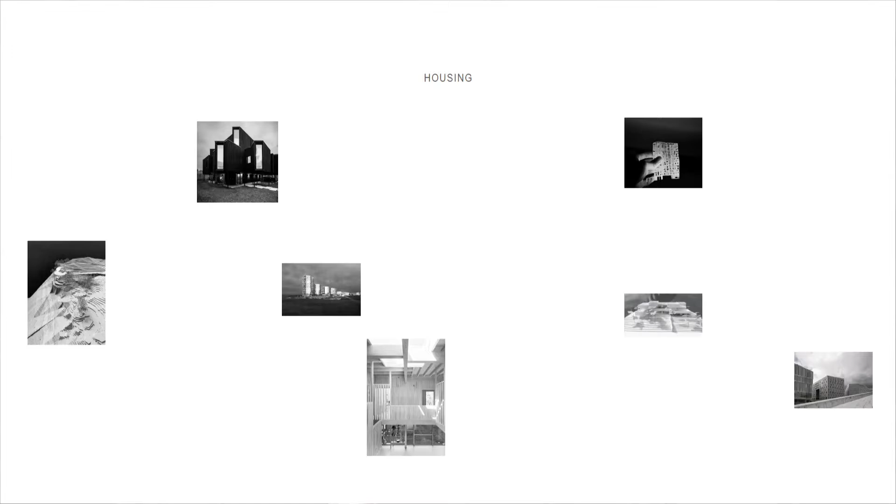This is an impression of the span of some of our work: public buildings, housing projects, quite a few smaller projects, rehabilitation of cultural heritage projects, and a lot of collaboration projects.

Today we will speak about four projects. I will start with our first project, which was a collaboration. Then I will speak a little bit about the library, and then Jonas will take over.

So this is our first project, which we did with some French architects, also young and ambitious. It was the city of Sandnes on the western coast of Norway, a traditional pedestrian shopping street that was dying because of urban development along the harbor with shopping malls. The city really wanted to do something to bring life back into this old pedestrian street. They asked for a competition with a covered small plaza with a stage and amphitheater seating.

So we started working, 7 partners, trying to find out how to work together. Lots of ambitions, we had all the time in the world, we were young, no families. But how to start, how to work? We did a lot of analysis, visited the site, and spent time together to get to know each other.

You can analyze the program as much as you want, but it doesn't necessarily come out the project. In architecture, that is what is so fascinating - there are many right answers. You cannot put all information into a robot and out comes the perfect project. So there will be many right answers.

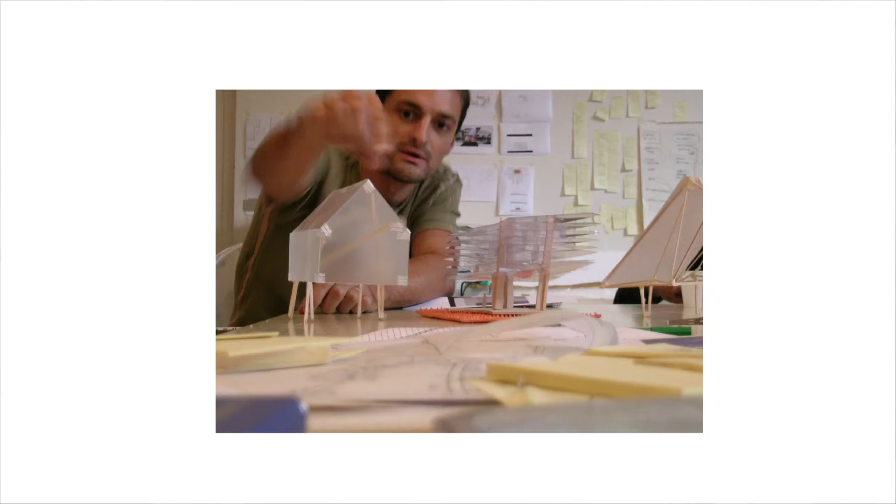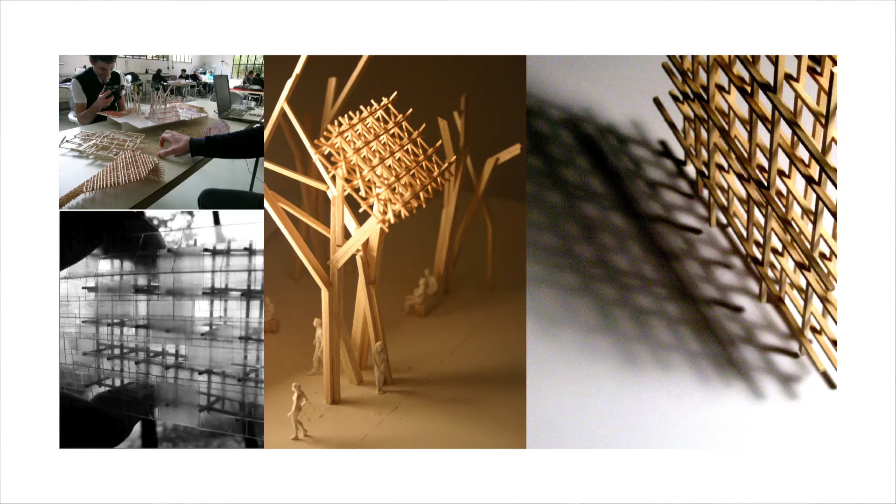So we suggested a quite simple, bold volume to give some kind of positive input to this pedestrian street. We rejected this idea of the fixed stage and seating. We said no, this should be much more informal, just the plaza floor floating between these columns. And we really tried to develop the structure so it could play with the light and changing weather.

So this is how it turned out.

So the Deichman Library project. Deichman is the public libraries of Oslo. The former main public library that was now to be replaced was built in 1932.

Already when it opened, it was criticized of being too formal, too inaccessible with all these steps. So the city called for a new library, 20 international architects competed.

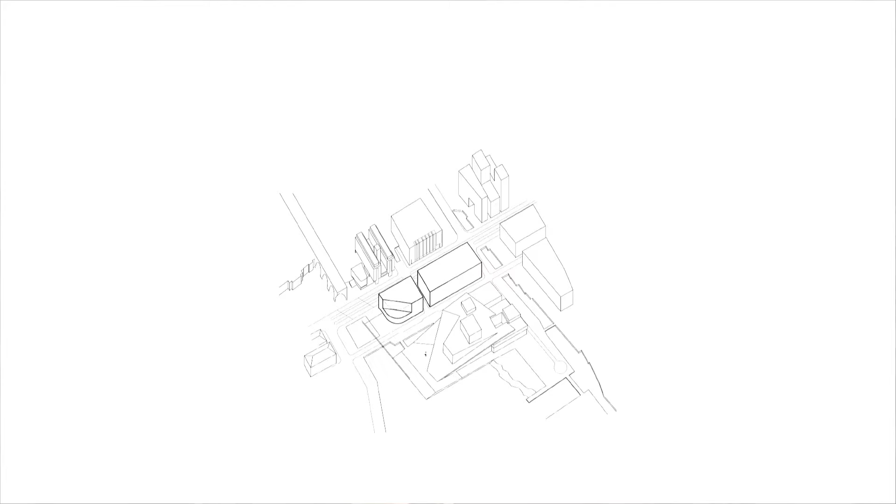And then we start working - a lot of physical models, and trying to work together to avoid this kind of personal ownership of the ideas, because that can be very difficult to handle in the process. So if you have developed lots of ideas together, it's more easy to evaluate them in an objective way.

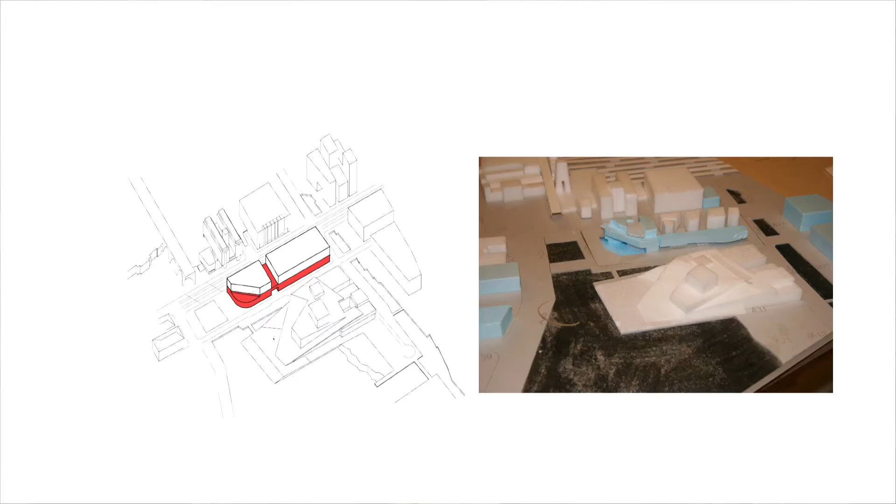One solution could be to build a horizontal library. That was tempting, of course, to have good contact with the street, let the people directly into the library. But it was some challenges with the street that was crossing, and we thought also maybe it's not good for the city to have this monofunctional thing, and also for our ambition of having this interconnected space where you can see things that you didn't plan, you are inspired to explore more. Here it would be very long distances.

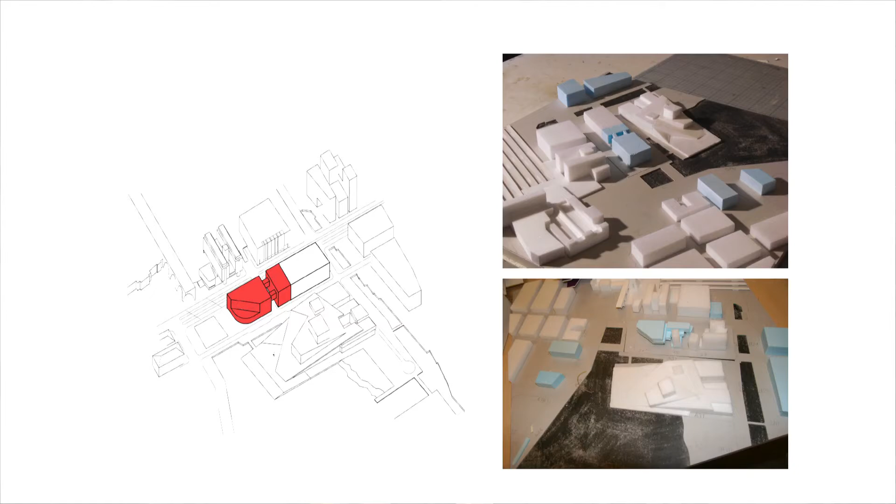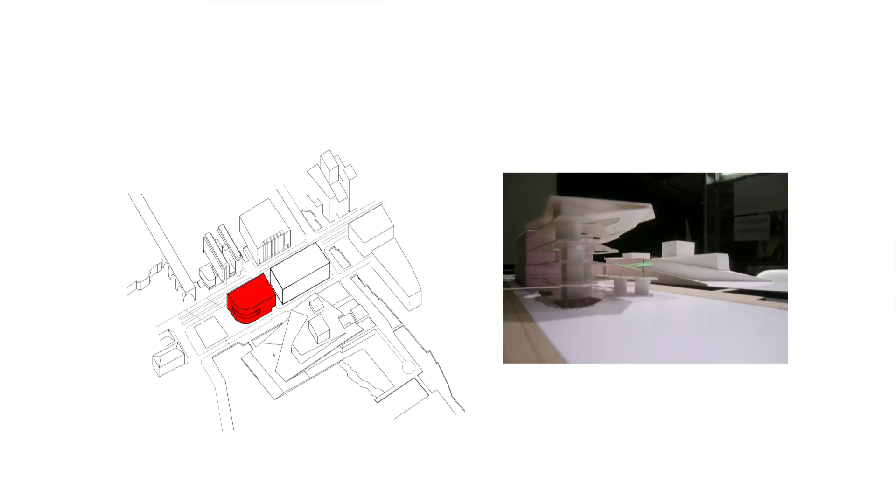We could put the library to one side or the other. This was the obvious placement because you have the public space in front, but the site was a little bit too small. By cantilevering some of the volume above a restricted sight line and the street behind, we managed to place the program inside what we thought was the right site.

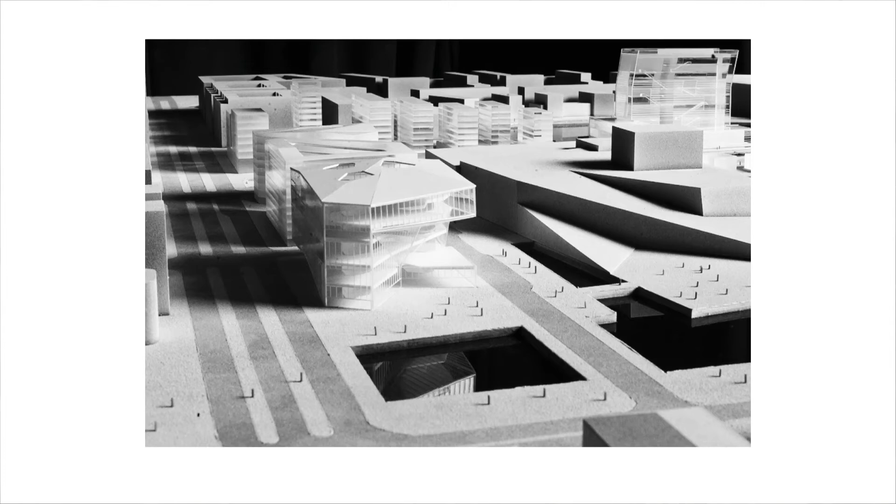So we ended up with a volume that was quite vertical, with 5 main floors, plus a basement and mezzanines. One main challenge with the library was how to connect these floors and inspire people to explore the different parts of the building.

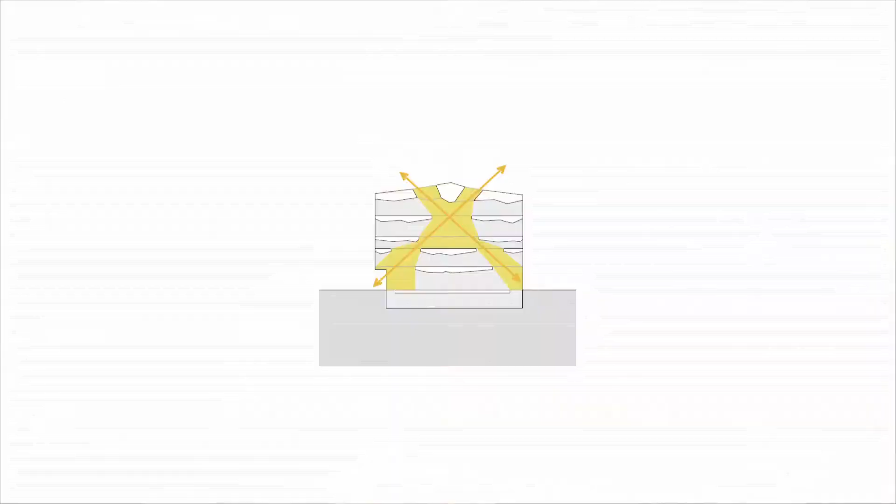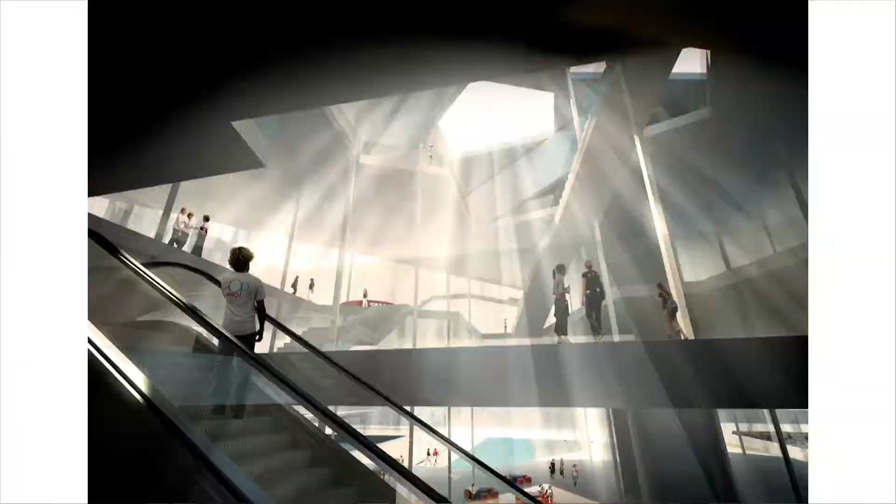We organized all the small rooms around the 3 vertical cores containing the infrastructure to maintain an open space where you can explore to see what is around the corner. In the open plan you get different spaces that could have smaller events, that you don't have to enter through a door to go to a small lecture or reading place.

Here we see axonometrics of the ground floor, where you enter from 3 directions into a central plaza. And you circulate up through the diagonal light shafts, the atriums. They meet on the 3rd floor to create a big atrium.

So there are lots of small places connected into this big space. Different intimate spaces where you can almost touch the ceiling, leading into very open big spaces.

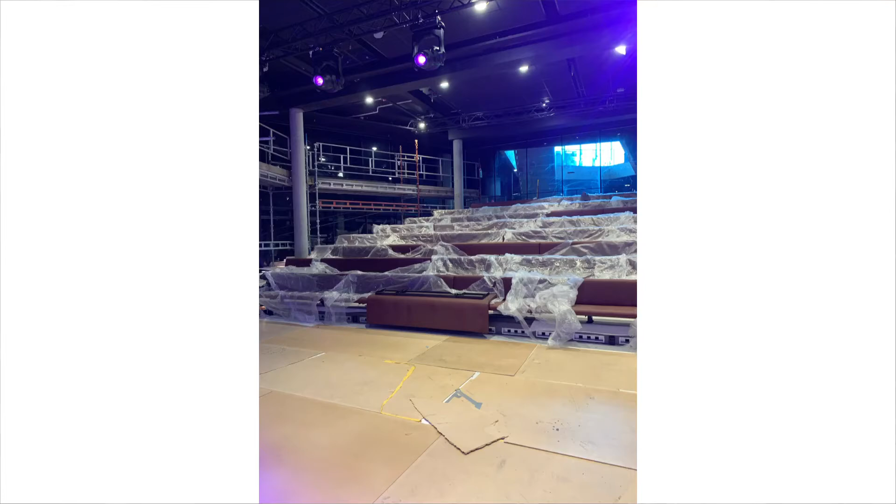Here we are in the basement where you can see all the way out from the big theater hall. We struggled a lot to keep this theater open, so from the entrance you can see all the way down to the stage to see some events happening.

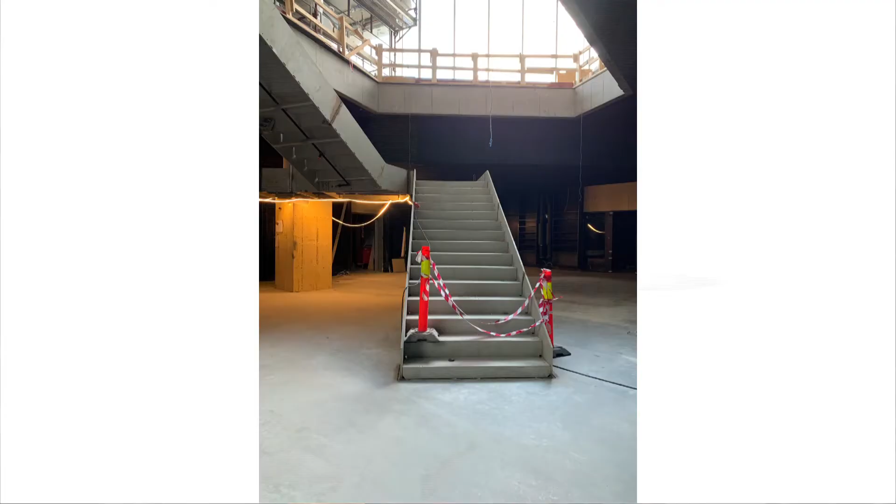A gallery in the basement where you can almost touch the ceiling. And working your way up, getting a glimpse from each of the 3 entrances, up through the building, up to the sky, to spark a curiosity to explore the building.

And we see these mezzanines also on the edges around this atrium, where there are lots of reading spaces. This is not a traditional library where you have closed reading rooms. You read in a social space, in the open.

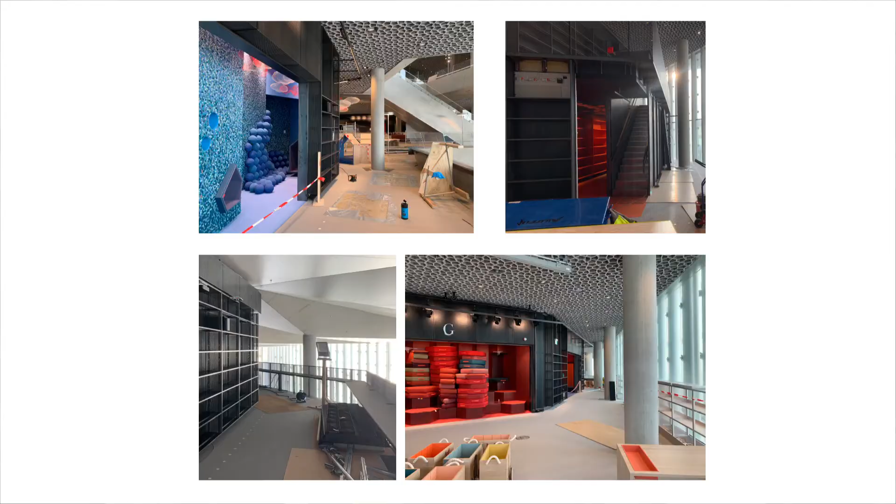And all the small rooms around the cores are open niches, more spaces than they asked for. It opens in 3 weeks.

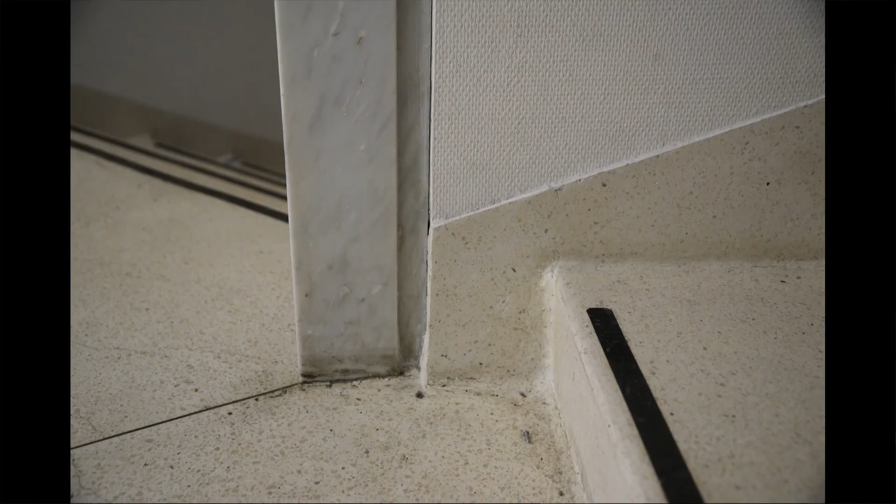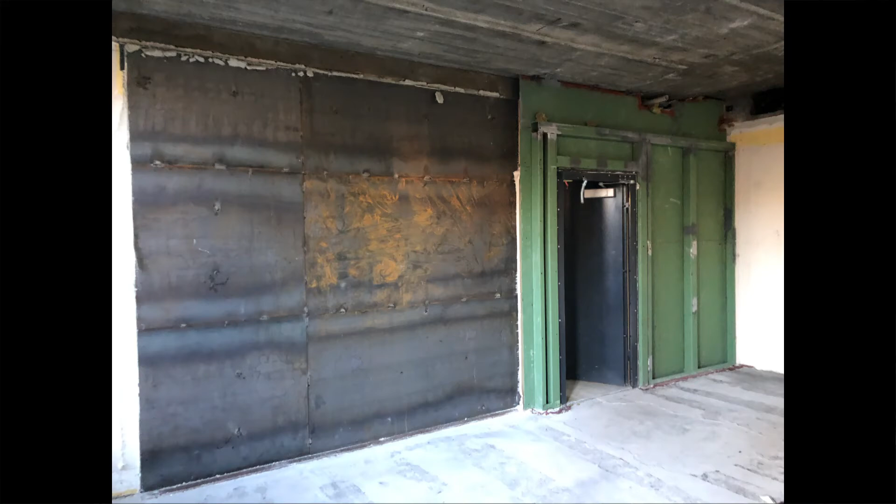For instance, this very subtle ornamentation, materiality, how they meet, how they are formed — electrical sockets and switches, handlebars, all these kinds of things — and also all the traces that the Americans have left.

This is a kind of security wall that was made probably in the 80s or something, with really thick steel. We don't know what to do with all these things, but we are working with it now. In about 1.5 to 2 years, you're all welcome to have a drink and see the first lobby atrium in the world. So, thank you very much.